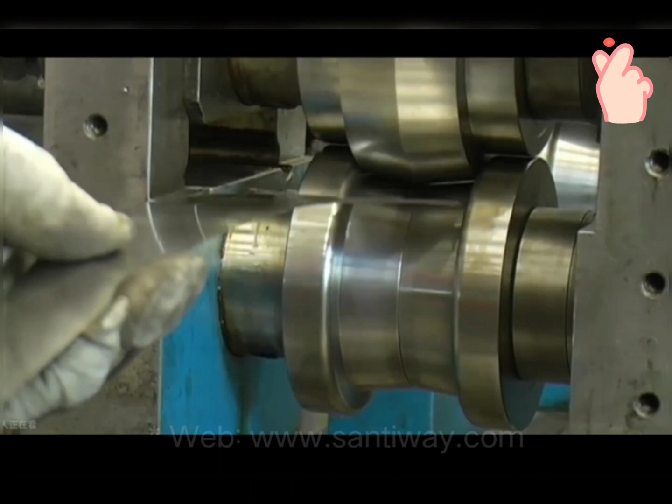Roll forming is a process where a metal sheet passes through a series of roll stands that change the sheet's shape. The sheet undergoes what is called a profile bending. Roll form details are very common in, for instance, the furniture, construction and car industry.

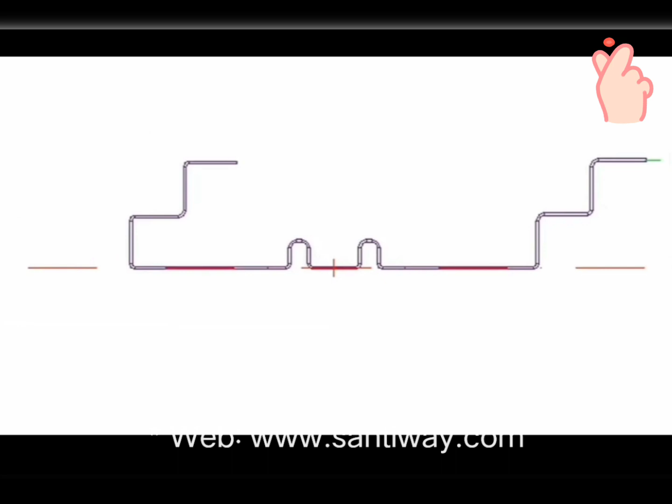It is possible to create advanced profile shapes in high-strength materials, and many different materials can be used. All materials that can be bent can also be roll formed. Roll forming is gentle on the material and has a minimum of wear on tools.

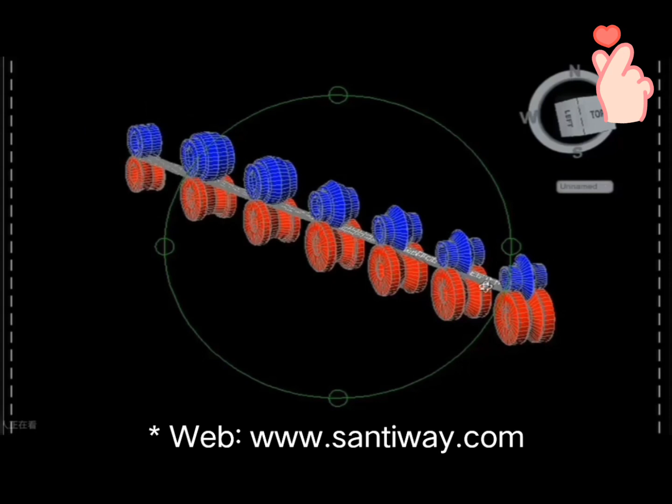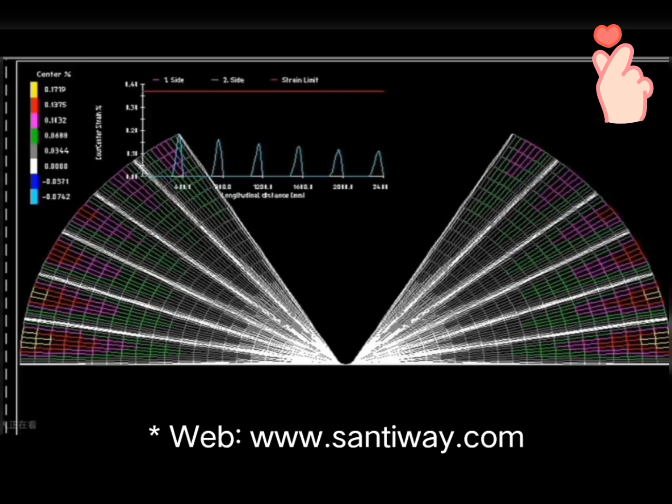Today, the roll forming process and the tools are designed in a computer environment before production. Computer simulation is an important tool in order to analyze the roll forming process. Geometry, forming forces and residual stress are factors that can be monitored in the material.

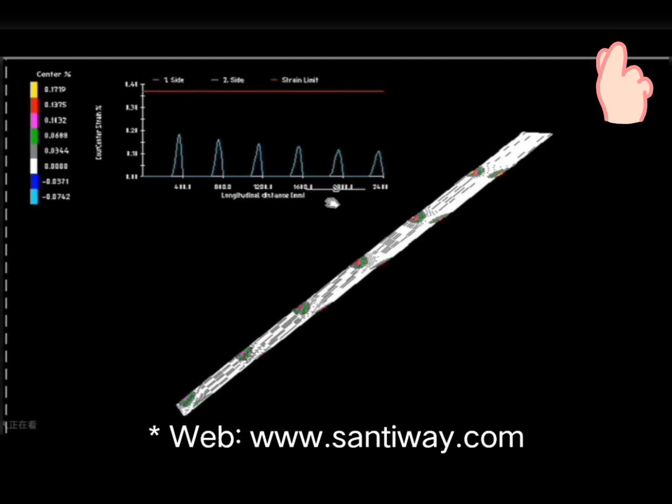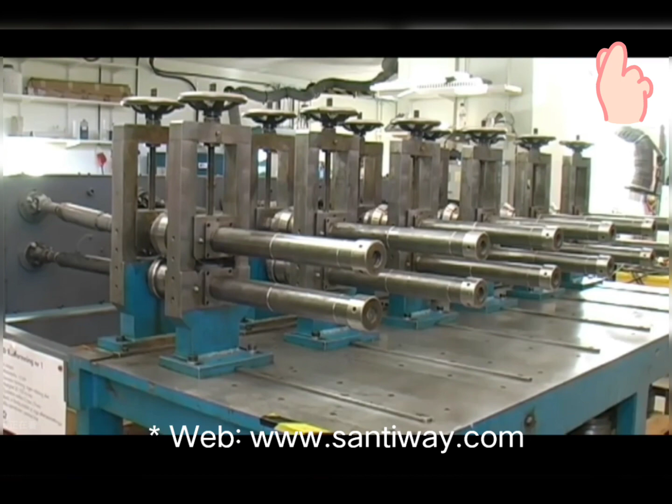The roll stands are designed so as to allow the material to undergo a gradual shape alteration. Here, the different steps are illustrated in a so-called flower pattern. This is a roll forming machine with 6 roll stands. It does not have an automatic feeder, instead it is fed manually.

More advanced profiles require more roll stands in order to reach a final result. This machine shapes the strip into a simple V profile. Note that the sheet springs back. Spring back is the elastic deformation that appears after shaping.

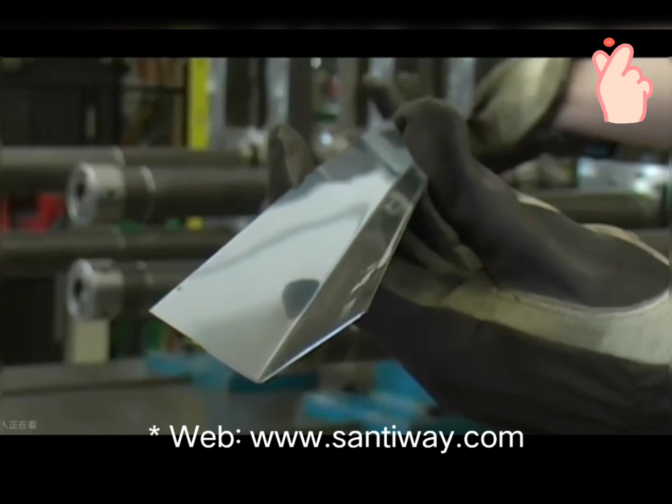Spring back is compensated for when the roll stands are constructed, thus overbending the sheet and letting it spring back into the correct form. What the roll forming tool looks like is decided by what kind of profile is needed. The starting point is to draw a cross section where the required radii, thickness and dimensions are applied.

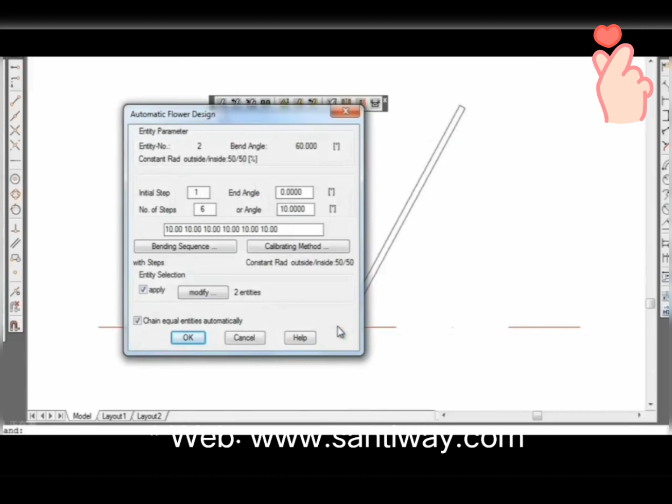The minimum radius for bending is decided by the thickness and the properties of the material. Here it is also decided if the profile will be punched or pre-cut and if it needs to pass through more preparatory stages before roll forming.

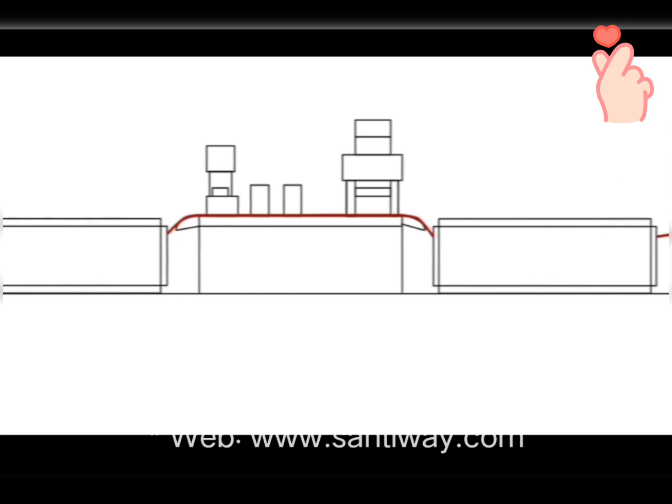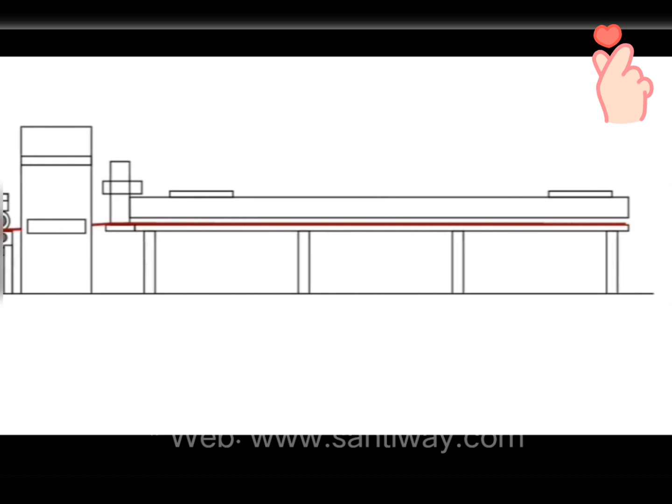There is a great demand for machines that can complete as many stages as possible in a single production line. If more operations can be incorporated into the production line, large volume processing will be more cost-effective. Roll forming can be a part of a production line producing profiles that do not require further refinement but are ready to be used immediately.